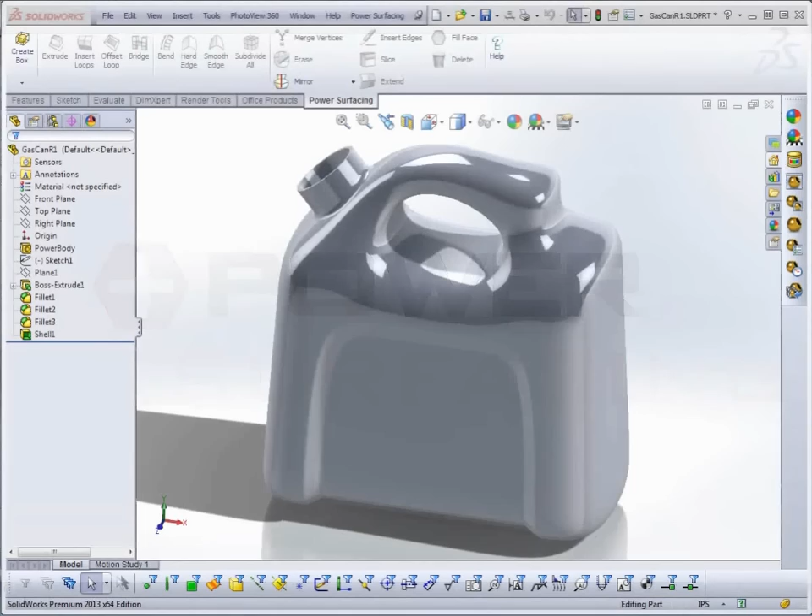Today I'm going to create a variation on the classic detergent bottle using PowerSurfacing in SolidWorks. There are a couple of different methods you can use to get started, but for this one I'm going to start directly in the PowerSurfacing tab, Creation Tools, and Create Box.

This automatically creates a new part file. The box primitive is centered on the top plane at the origin point. I want my box-shaped control mesh to be 10 by 8 by 6, so I'll type in the size and then accept to go into edit mode.

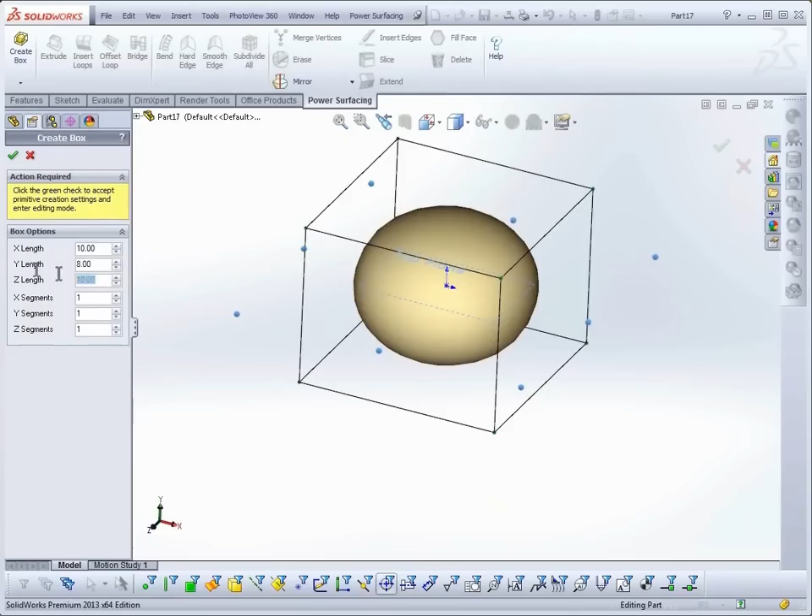The default display mode is sub D plus cage. The more subdivisions you have, the closer the sub D resembles the control mesh. So until I've added a few more loops, I'm going to toggle control mesh display mode on in the viewing section. I'll start by selecting the top face of my box and scaling it in on the world Z-axis.

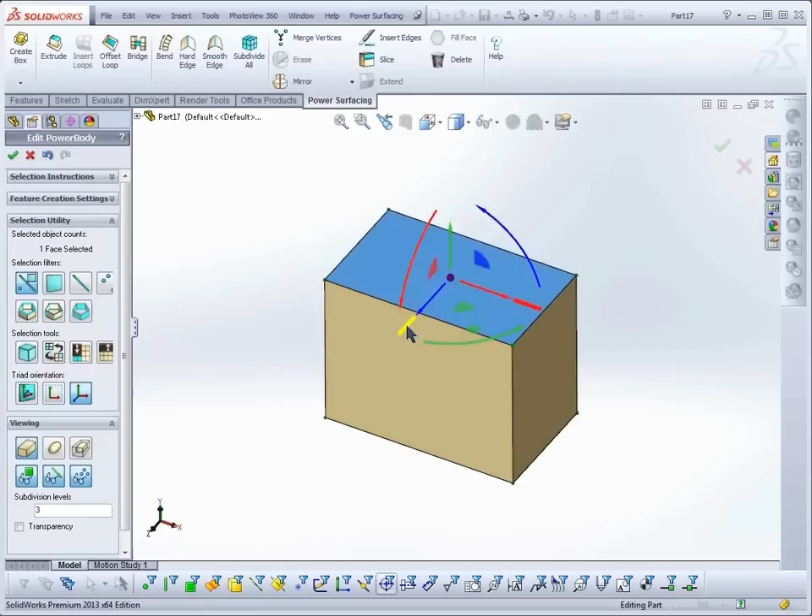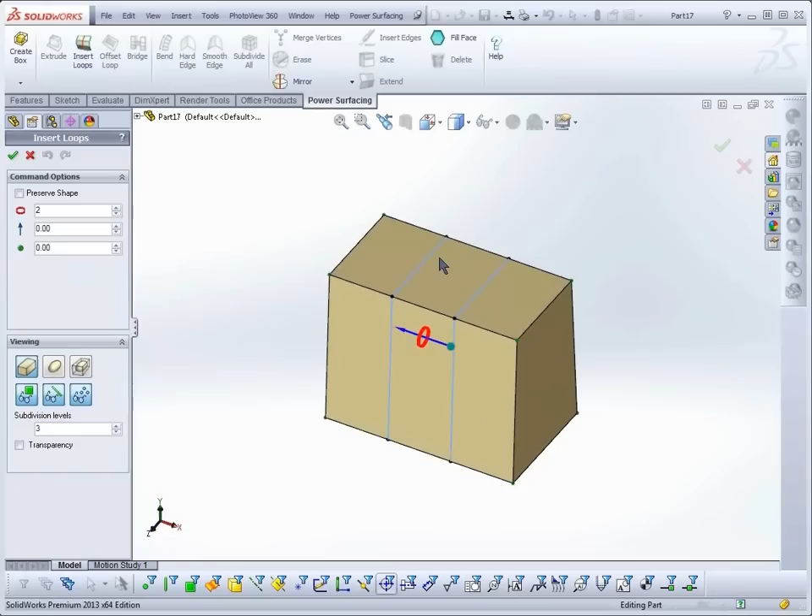Since I'm in Select Any mode, I can hover over an edge, double-click it in the center to select the edge ring, and then from the right-click menu, choose Insert Loops. I need a couple of loops, so I'll use the Increment Value gizmo and drag up in the viewport to increase them to 2, then right-click to accept.

Back on top, I'll select the two outer faces by holding the Control key down, then switch to the A key while pulling the Y-axis of the triad up for a quick extrude. While I'm there, I'll scale them in a bit, and move the front edge back to start to define the slope where the spout will go.

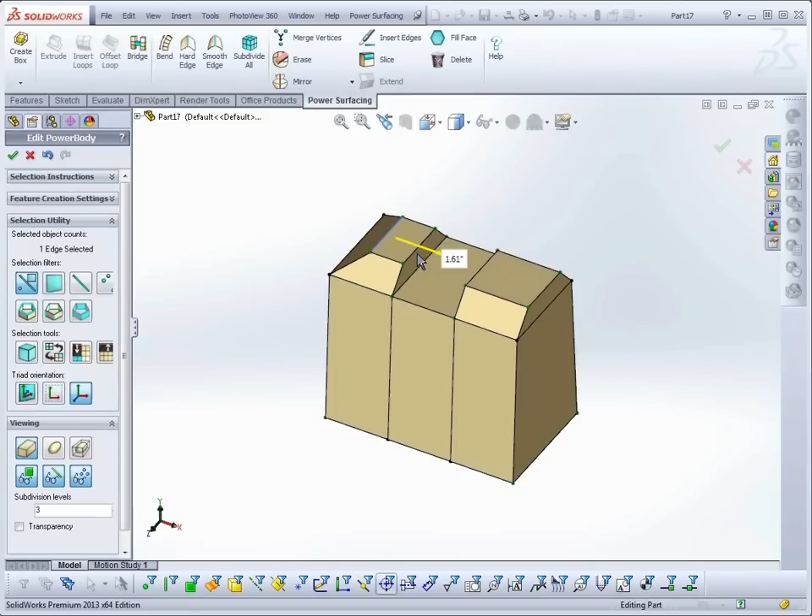I'm going to need one more loop at the back. For edges, if I hold the A key down and hover over an edge, I get a preview of the loop to be inserted, and then I can click where I want it. It's important to remember that the sub-D edges will not end up where the control mesh edges are, so there's no reason to try to be exact at this stage.

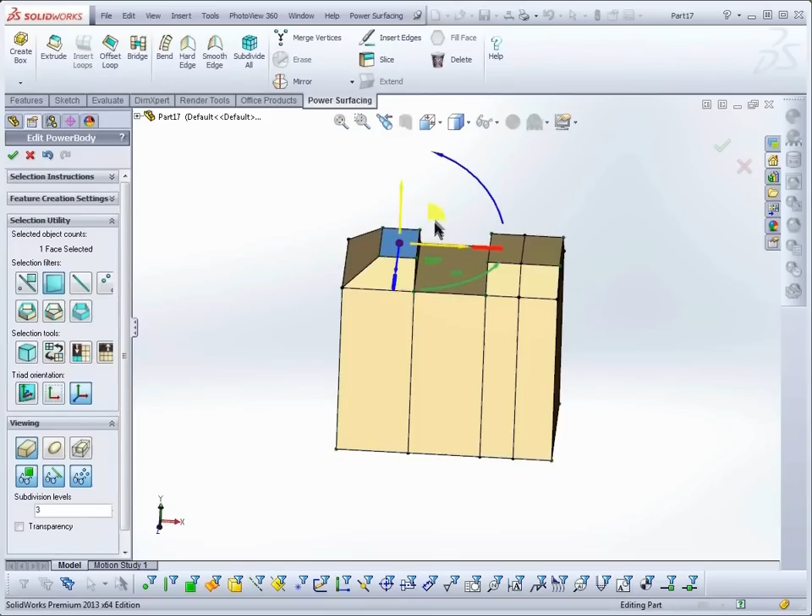Now I'll switch to just face mode while I make the handle. I want the front of my handle to flow back from the spout, so I'll extrude using the A key and rotate the top face a bit. Then, using the local coordinate system, I'll scale it in a little and extrude again. Next, I'll extrude the back piece to match.

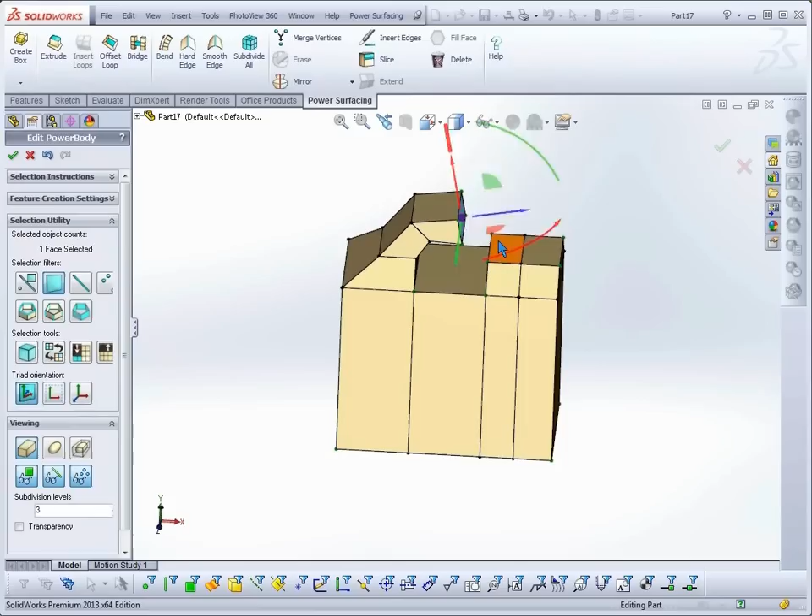After selecting my two faces, I'll pick Bridge from the right-click menu and Accept. This time I'll use the familiar green check mark. I'll select the new faces and scale them in.

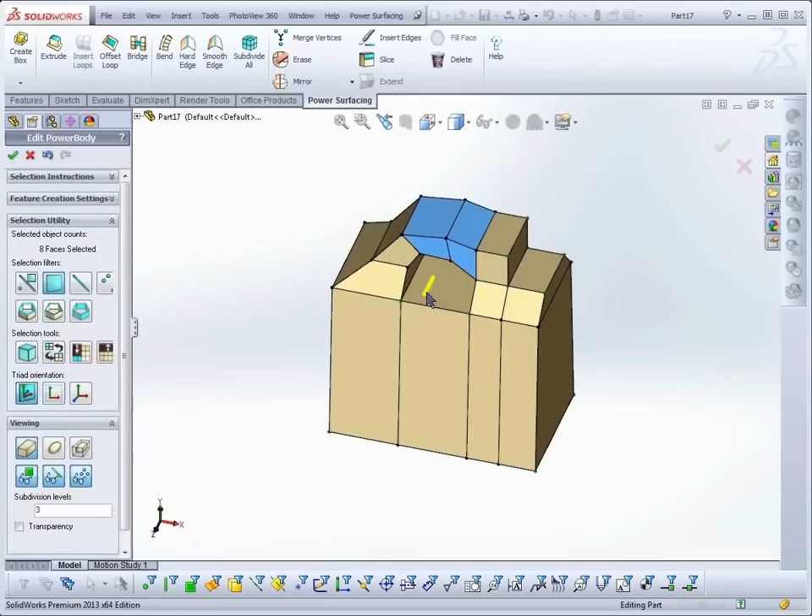Just to show you what a few extra loops can do to the shape, I'll switch to sub D plus cage for a minute. The body of the gas can is still pretty rounded near the base. So I'll select my edge rings and use Insert Loop again, and set the loop count to 2. But this time I'm going to set the slide loops to 50 to spread them apart so the sub-D is pushed out closer to the control mesh cage. And right-click to finish.

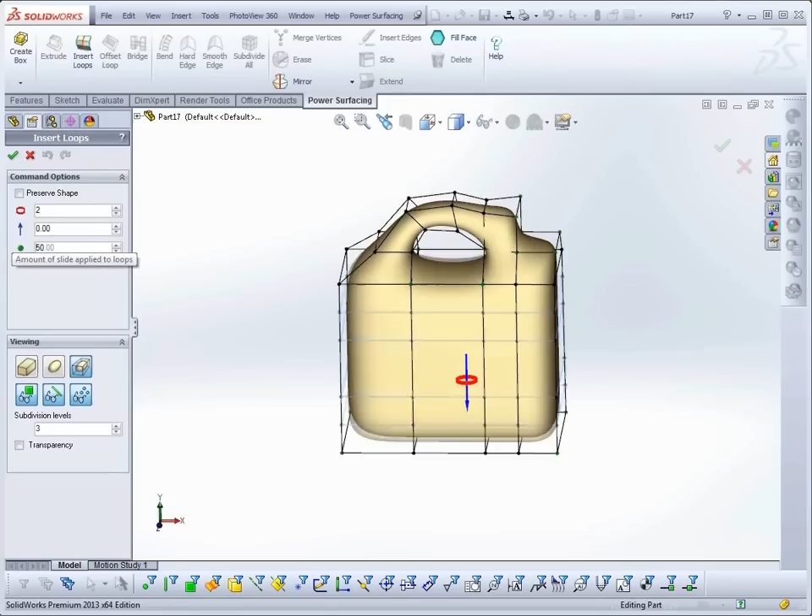Now I'll select the sub-D display mode from the viewing section. To get the inset area, I need to drop one more loop near the front of the model. I'll do this using the A key again.

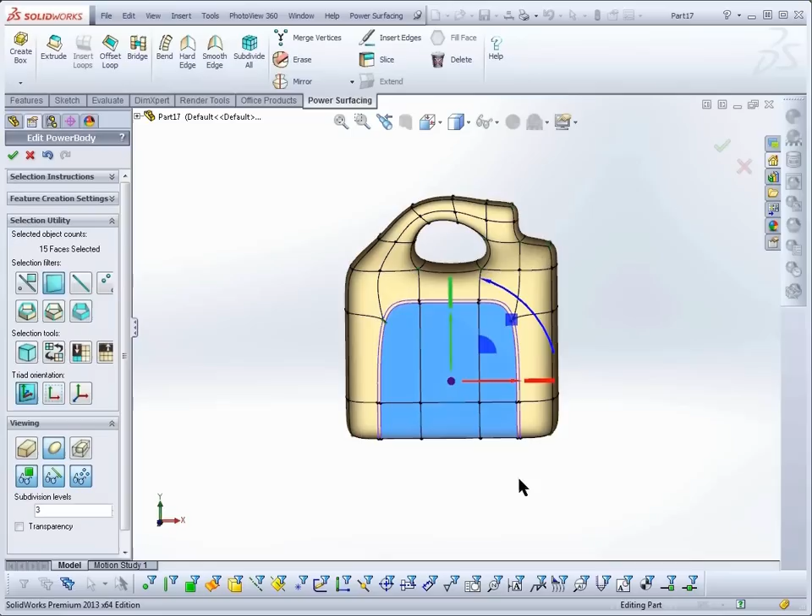Now I'll select the inner faces, and from the right-click menu, select Hard Edge to give it a weight of 100%. Next I want to use Offset Loop, also from the right-click menu. And once again, I'll add an edge weight to my selection with Hard Edge. Weighted edges will be retained on conversion, allowing you to add fillets or chamfers.

I need to scale the offsets in first. Let's go ahead and make the conversion.

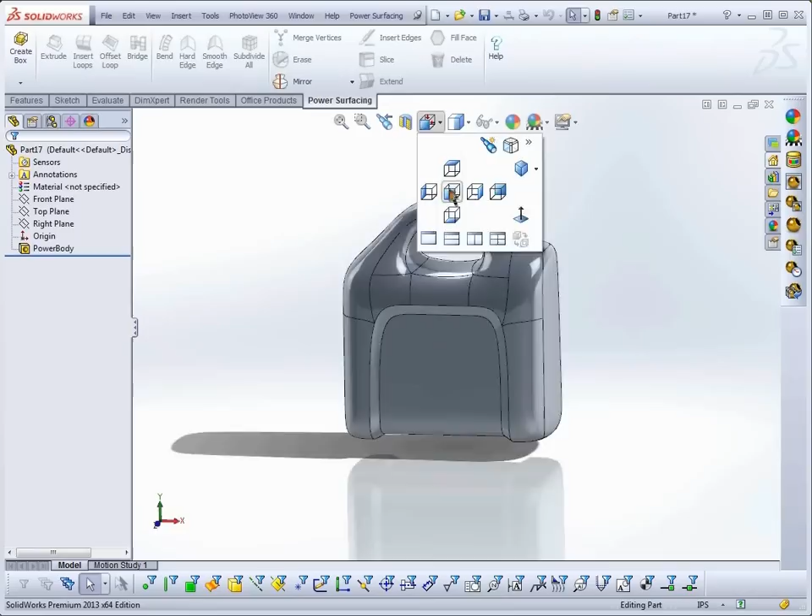From here, I can make a new sketch for the spout. I'm using a line to get the angle to create a plane on, and then creating a circle to extrude for the spout.

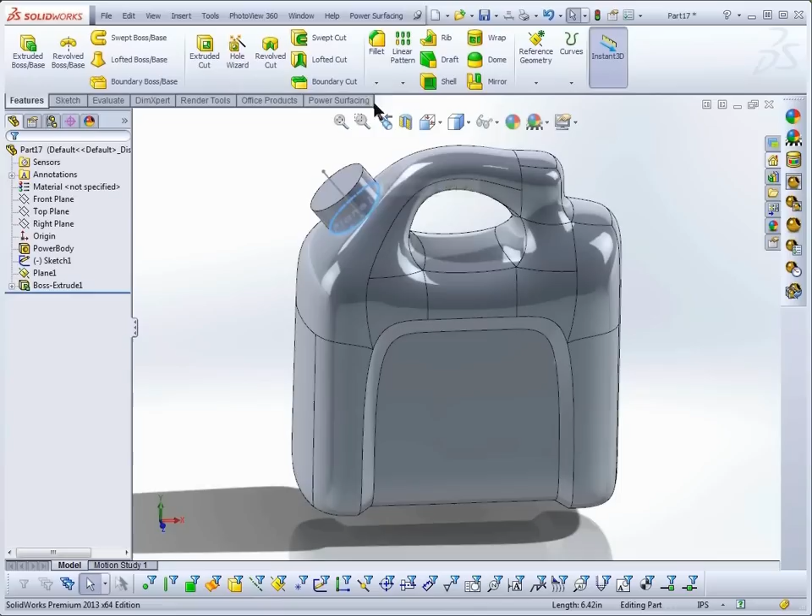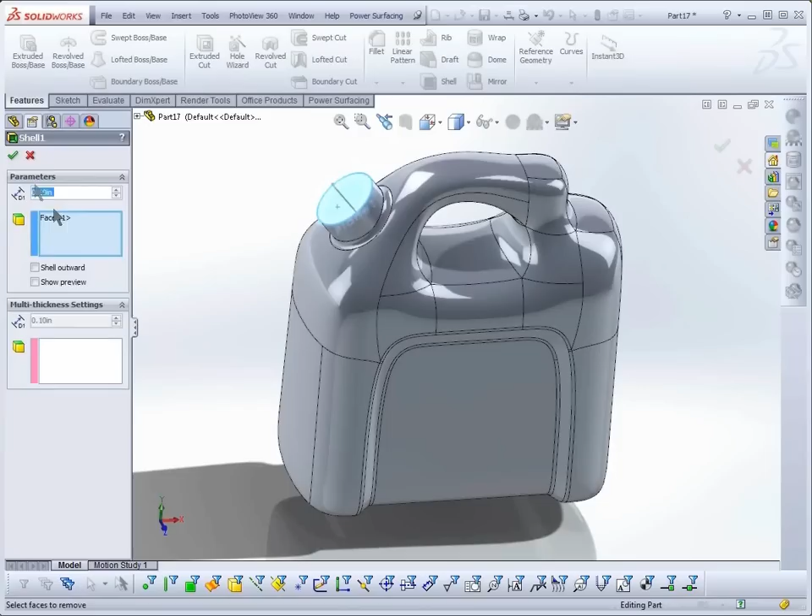I want a nice big fillet where it connects to the sub-D body. And then some fillets around the hard edges for the inset. Next, I'll add a shell of about 0.1 thickness. And then I'll check out the result with Section View.

I might want to go back and make some minor adjustments to the body. I'll click on my Power Body to get Edit Feature and return to Edit Mode. From the Advanced section, I'll turn on Soft Selection,

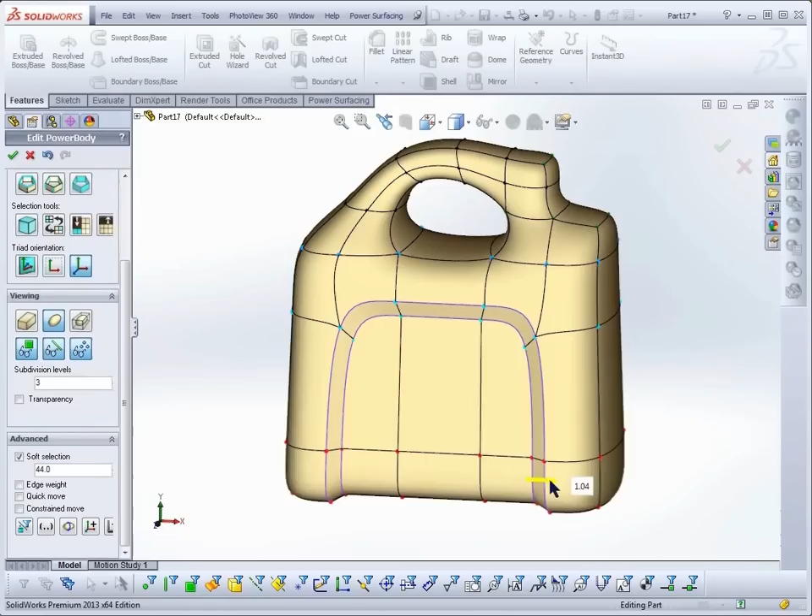Grab the bottom vertices, increase the distance, and scale, and convert. And my feature tree is intact.